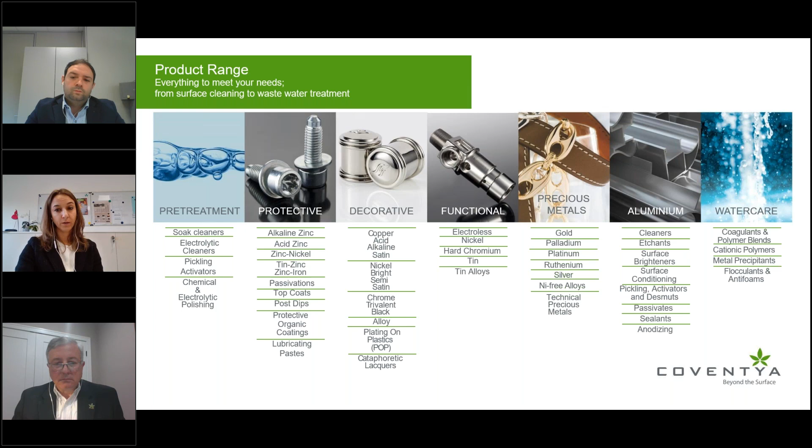We have a range of products for aluminum, covering all the treatment of aluminum, preparation and anodizing. We also support our customers in wastewater treatment with our product range for water care. You could find Coventya products across various industries: aerospace, automotive, fashion and luxury, white goods, energy, data storage, connectors, packaging, lighting, sanitary fittings, and so on.

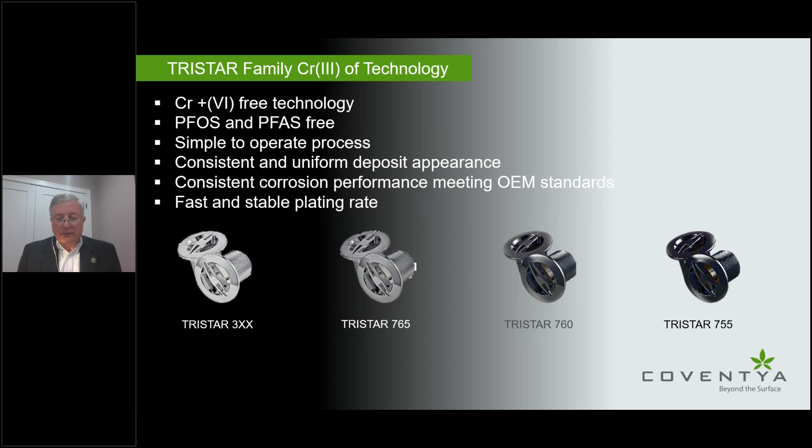Anyway, we've got basically both types of chemistries. We've got a Tristar 300, which is a chloride-based chemistry, which have a whole different set of attributes. And then today we're going to talk about the Tristar 330 AF, which is sulfate-based chemistry. And again, these meet all the OEM requirements that we need. What we can say in this newest generation of trivalent chrome, sulfate-based, it's ammonium-free too, which is a very important aspect of this new platform.

It was developed by Coventya, and we started introducing this in 2017. The process chemistry has different modes of system operation, which is something unique that a lot of sulfate systems do not have. We'll talk more about those unique properties in the course of this webinar. It also, the process offers very, very outstanding performance over present state-of-the-art. So that's why we feel this technology platform is the next generation of what you will see in the market, because it has so many advantages and so much versatility in what it will do.

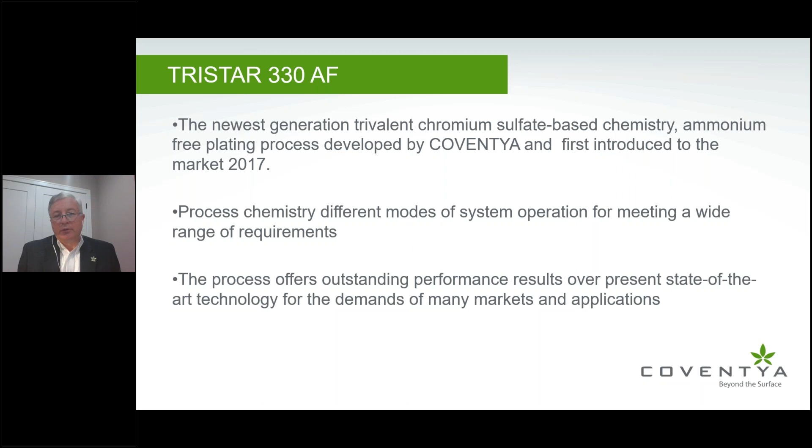Chrome 6 is applied over a lot of nickel-plated surfaces to provide decorative appearance, but also some corrosion performance properties as well. In the case of the Tristar 330 AF though, we've been able to actually adjust the operating mode of the chemistry to focus in on one or two of the important attributes. So if your customer is very focused on color, if they want a visual color that looks like Chrome 6, the blue, the aesthetic color that's similar to hexchrome, we can set the chemistry up to operate that way. And we've done a lot with colorimetry, the CIE LAB, Alberto will talk about, but we can achieve deposit hue colors obtainable from a -0.5 to a -1.5 in the B value, and Alberto will explain that momentarily.

If the customer needs decorative, of course, they're applying it for decorative reasons, but they need more functionality out of the system. What do we mean by functionality? We need to meet the high demands of either a high neutral salt spray requirement or a CASS corrosion resistance. And in that case, we've set the chemistry up a little bit differently, and we'll show you those differences shortly.

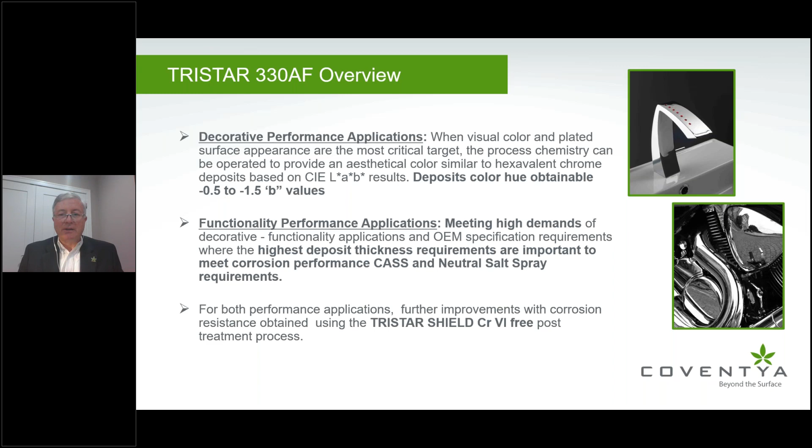But in both performance applications, we can even further improve the performance of corrosion using a new post-treatment system called Tristar Shield. It's a Chrome 6 free post-treatment, it's electrolytic, and it does a wonderful thing to the deposits here to improve their overall performance. So we've really been able to, with the R&D group, develop a system that is very sustainable today, but also into the future. And that's what we see.

So Tristar 330AF, Tristar Shield, our Chrome 6 free post-treatment, and we have also for furniture goods and tubular goods where you have the ID surfaces that require some protection because plating doesn't go there, of course. We have our Tristar Post Dip HM, which Alberto will speak about also. From the research that our company's been doing for 15 years plus in the development of these technologies, we've always maintained that, of course, we need them to be Chrome 6 free, but we want them to be ammonium free, cobalt free, and of course now PFOS, PFAS, PFOA free in the system. So these are important characteristics that we've had in mind with the whole development of the whole platform.

So some of the main features here, again, let's focus on the two different modes of operating. Why would you need that?

Again, if we're going to focus on the functionality of decorative applications, where you need high corrosion performance, or you need some type of higher level than just color performance, we use these on interior and exterior automotive vehicle components. In the plumbing and sanitary fittings area, there's a lot of need for those high corrosion performance applications. But also on the same spectrum, people like the color.

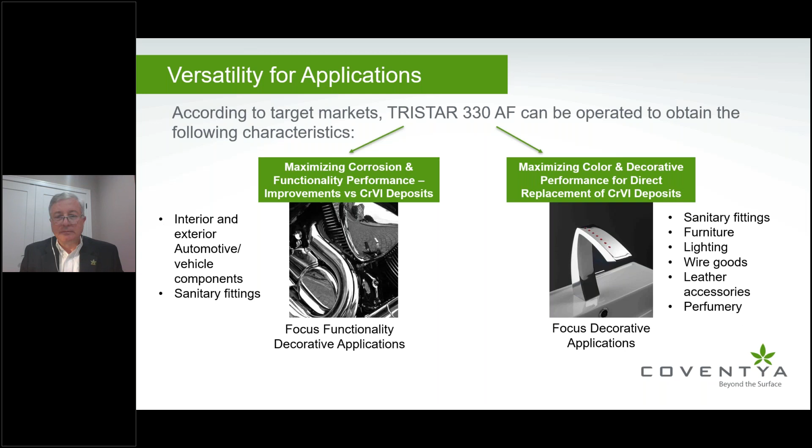Some of the features and benefits - there's a lot that can't be covered in this type of webinar, but to give you an overview, it is a production proven process. Alberto and his team are hands-on, they've done a lot with this technology in Italy and other parts of the world. So we've got a lot of experience since 2017.

We can meet both the functionality performance requirements and applications. Corrosion resistance is good. We can get the decorative performance applications, the color that people want, and we can balance the system to do a little bit of both.

And that's important - we have high throughput, high deposition rates. You'll see a difference in what we target for functional application versus decorative. We can achieve very high neutral salt spray resistance today and good CASS resistance when we incorporate the use of the Tristar Shield electrolytic post-treatment system.

One of the other elements that are important today is people are looking at nickel leaching, or the leaching of nickel layers, in a lot of different applications. With Tristar 330AF and the Tristar Shield, we can show, and we've demonstrated, that we equal Chrome 6 from the standpoint of the reduction of leaching of nickel from these coatings.

Of course, we've always had in mind the design of ammonium-free types of technologies. Also, with trivalent chrome systems, they need to be purified a little bit differently than chrome 6. With chrome 6, we worried about just a porous pot to keep trivalent chemistry reoxidated to hexavalent chemistry. But here with trivalent, the electrolyte is purified with a resin system, and we can dummy plate if we have to. So we can do all the same things with trivalent technology that we've been successful with over decades with chrome 6, just avoiding the chrome 6 altogether.

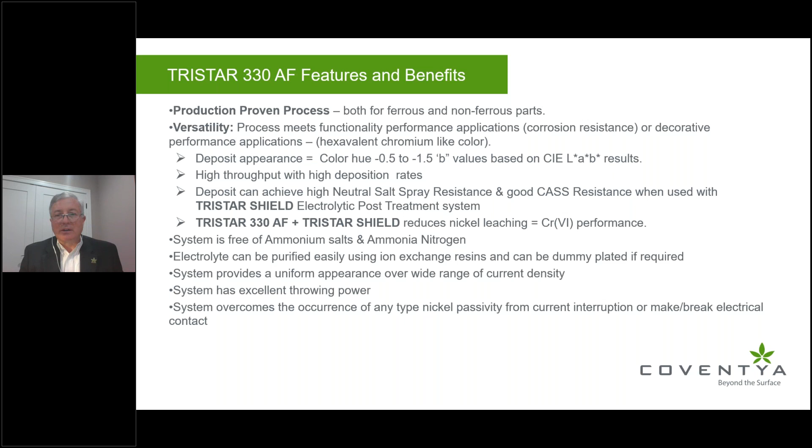The process sequence is very similar. Once you get to the nickel, active nickel surface, we have some rinsing, and then we apply the Tristar 330AF technology. We've got rinsing, and then if you need the additional corrosion performance protection, we have the Tristar Shield and the post-dip. Alberto will talk quite a bit about these technologies and some of the advantages we've seen with them.

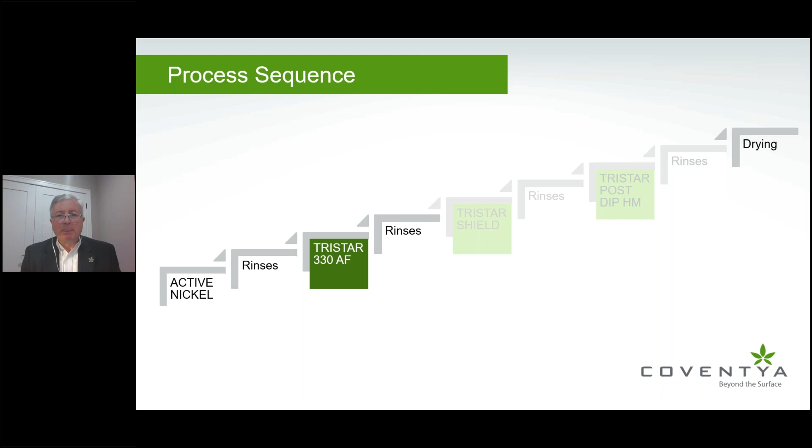If we look at decorative performance versus decorative functionality performance, we're talking about more functional application needs for the deposit versus a more decorative one. Some applications just want it to look very nice. They don't have all the corrosion performance requirements.

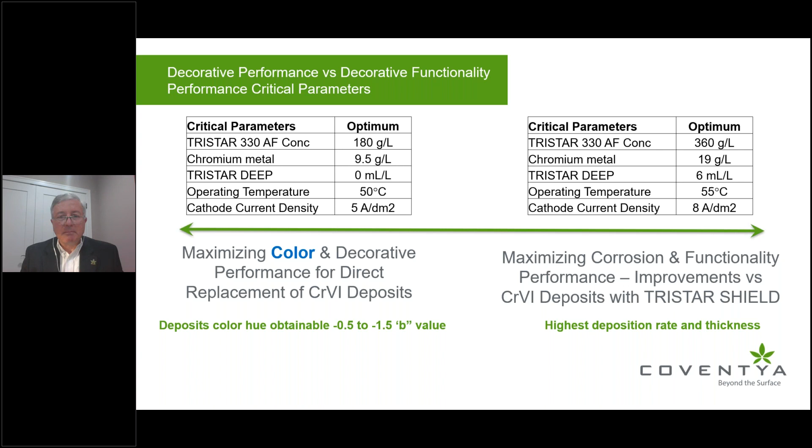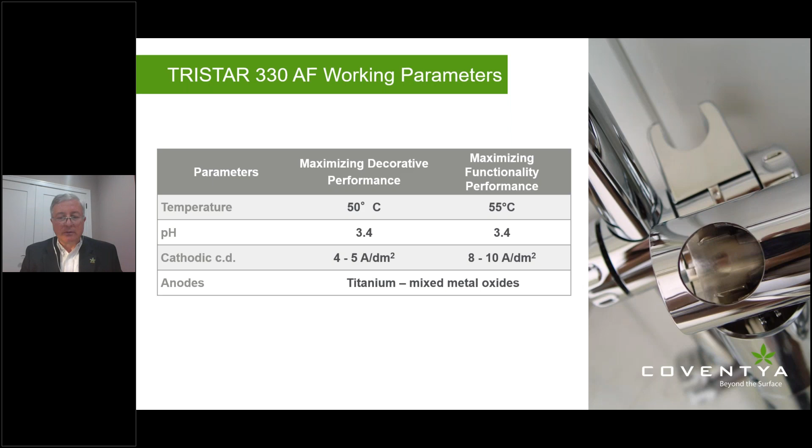Next, if we look at some of the details of the working parameters, one of the differences is operating temperature and pH between the decorative and functional performance systems. One of the biggest advantages of trivalent technology is a much higher pH than chrome 6, which is very acidic - these are less acidic than those. But again, we operate at different current densities. We use titanium anodes with mixed metal oxide coatings for this technology, and it operates very successfully under those guidelines.

So in a quick summary of where we are, we've got 4+ years of production experience, and Alberto Chiappa will talk about that in our replacement of chrome 6. It's got a very uniform aspect, wide range of current densities, which is very beneficial for a lot of complex parts. It has excellent throwing power - the distribution is very good over current densities. We have limited defects from current interruptions or other types of racking issues.

We can control the contamination through a resin system, a purification system. And it is a patent pending technology - it's a much different platform of sulfate chemistry than is out in the marketplace today, and that's why it's very unique. It's very important because of that fact, and it will be the next generation of what we see in the replacement of Chrome 6 technology.

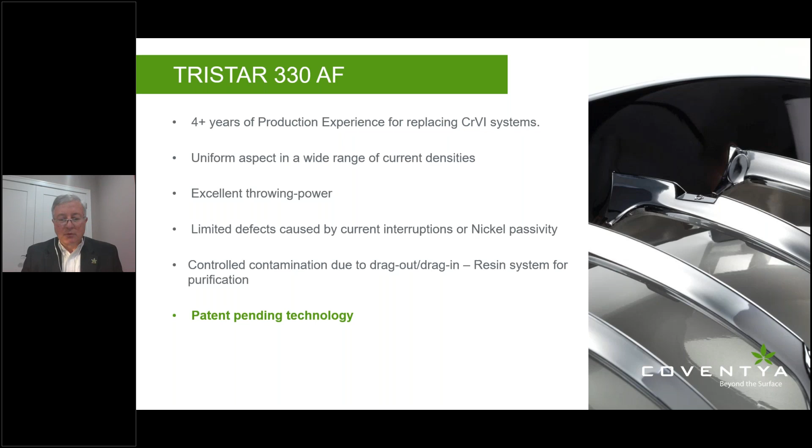So with that, Alberto Chiappa will talk about the process and deposit performance characteristics. And then afterwards, we'll do a quick summary and then we'll be ready to answer all of your questions. So thank you, and Alberto, I turn it over to you.

Okay, good morning, good afternoon everyone. Thank you, Brad, for your presentation. I am Alberto Chiappa, the Italian product manager for Deco and POP processes.

In the next slide, we will analyze Tristar 330AF process and deposit performance in terms of CIE Lab color, efficiency, very good resistance to cleaner dedicated to sanitary fittings, corrosion test, and salt spray test.

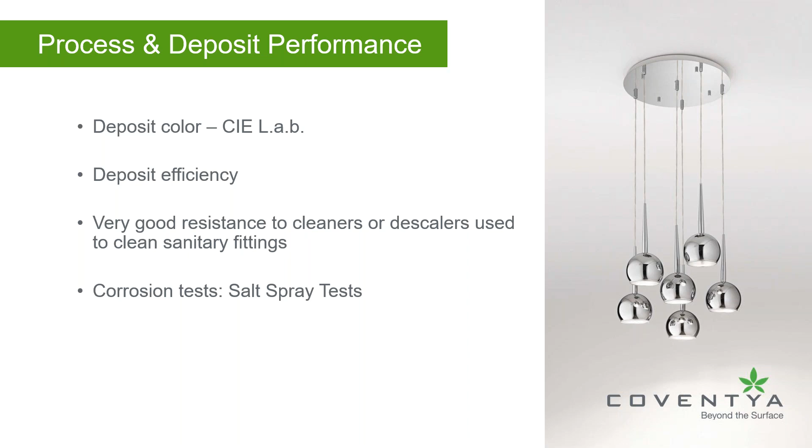CIE Lab gives the opportunity to understand the color of the chromium layer. You have 3 color coordinates indicating different color shades. The L coordinate has a range between 0 and 100. 100 is the maximum value representing the white color of maximum reflection, and 0 is the maximum absorption, meaning black color. The coordinates A and B, on the other hand, have no limit but a positive or negative value. The negative A coordinate controls green color, while the positive one controls red color. The positive B coordinate controls yellow color, while the negative one controls blue color.

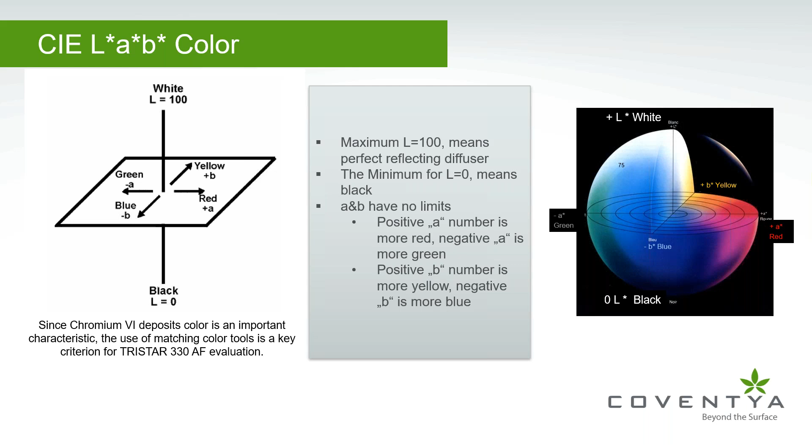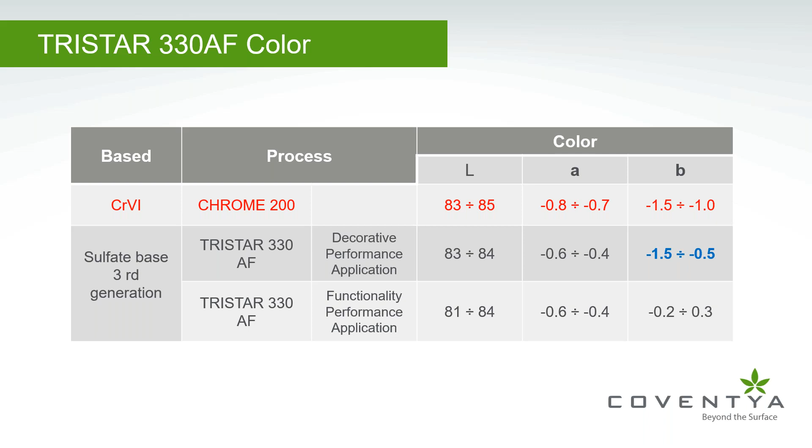This table compares hexavalent and trivalent coordinates. As you can see, the value of L and the value of A are very similar. Regarding the B value, we notice that the decorative version is very similar to the hexavalent coordinate, with a very negative B value of minus 1.5. Even the functional version has a B value tending to the negative. In summary, both versions, but mostly the decorative one, can be mounted with hexavalent chromium items without noticing the difference.

We compare now the deposition efficiency of hexavalent chromium plating and Tristar 330AF. As you can see, with both versions, but mostly the functional one, the Tristar 330AF has a higher plating rate. This allows the process to be installed without changing the position of the chromium plating tanks and the system cycle. In addition to that, the process does not lose in terms of performance.

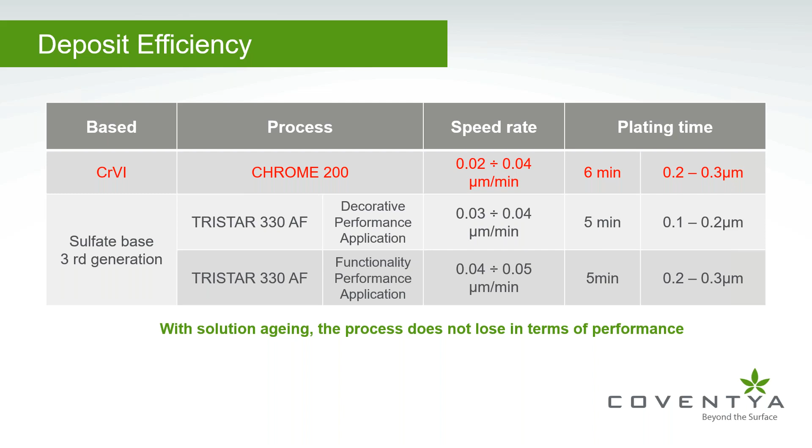The most important cleaners used in the sanitary field have been tested according to the sanitary specification. The following have been tested: Mastro Lindo, Vinegar, Napisan, Sidol, Bref, Viakal. Tristar 330AF does not discolor or degrade when exposed to these cleaners.

Next topic is corrosion resistance. To pass the test in the production cycle, you need to add a new post-treatment step called Tristar Shield. Tristar Shield passivation is a process free from Chrome 6. It is a single step. All additives are analyzable, it is easy to install, and its use does not change the deposit aspect. Finally, this process is patent pending.

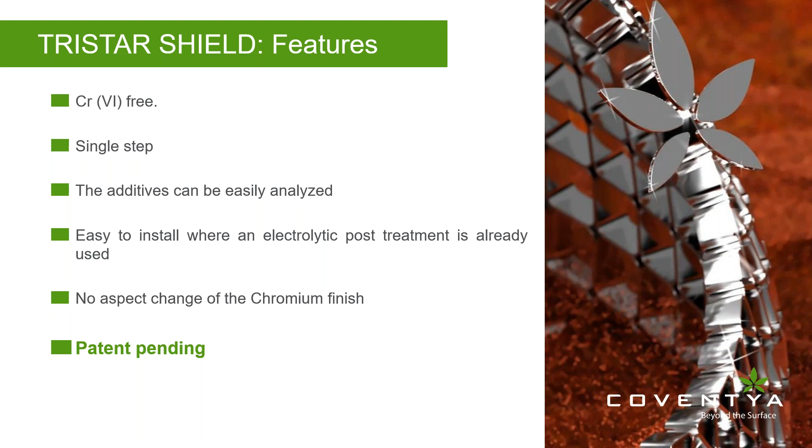Trivalent chromium plating cannot create a protective oxide film like hexavalent chromium. In fact, the layer of the deposit with no post-treatment allows slow nickel corrosion with the formation of oxide on the top of the surface. Only the combination between Tristar 330AF and Tristar Shield creates an oxide film formation, sealing the micropores and retarding nickel corrosion.

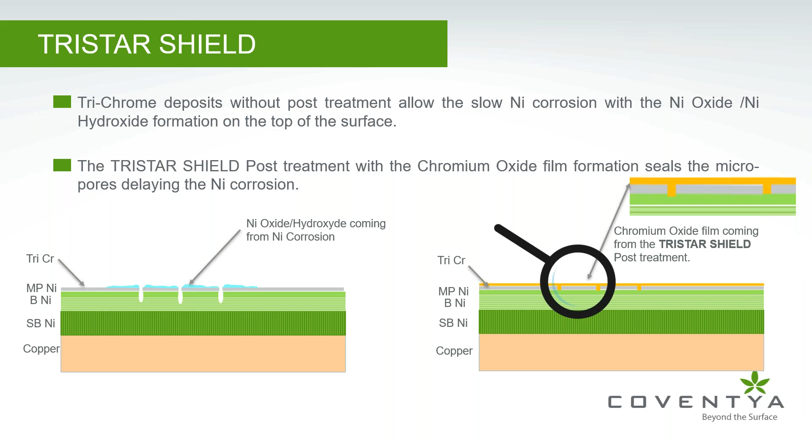These are the tests passed thanks to the combination of Tristar 330AF and Tristar Shield: the neutral salt spray test, the natural exposure and storage test, and the nickel release test.

The table recaps the working parameters of Tristar Shield. It works at 28 degrees, 9.5 pH units. It has a density of 1.5 Baumé degrees, and the anodes to be used are stainless steel 310 or 316. We also recommend solution filtration. The passivation is electrolytic, and in this case Coventya supplies the rectifier to ensure process performance.

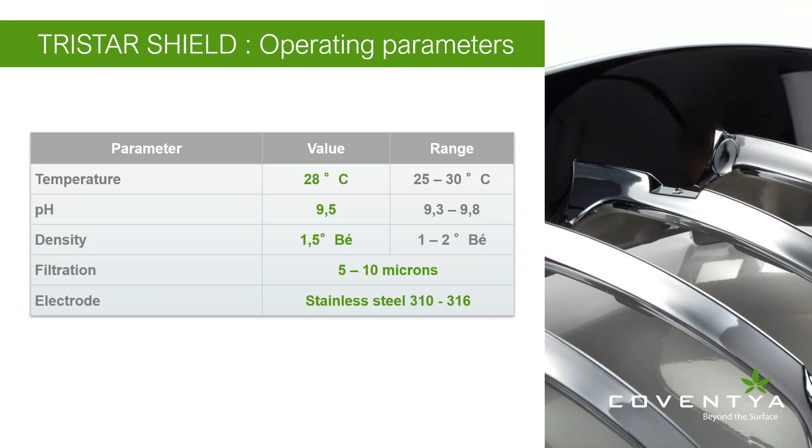Now you can see how Tristar Shield on brass or zinc die cast base material helps passing the 480 hour salt spray test with no appearance of stain, holes, or other change due to corrosion.

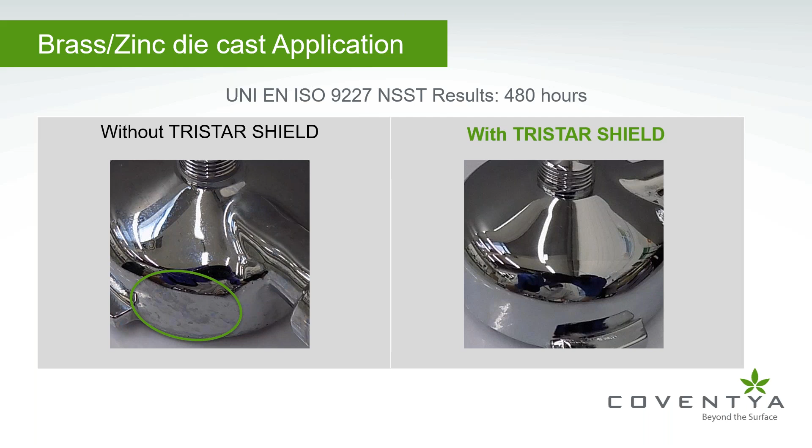On an iron base, Tristar Shield helps passing the 24 hour salt spray test. This result is comparable to hexavalent chromium plating. As you can see from the picture, Tristar Shield manages to protect the less covered and more porous areas that are easier to be exposed to rust occurrence.

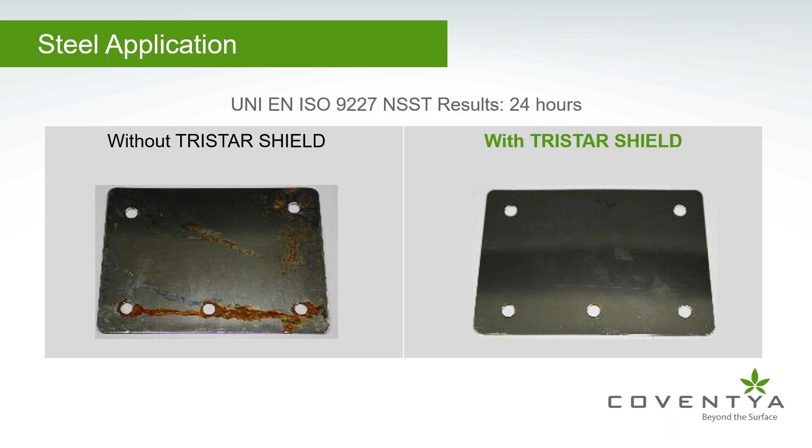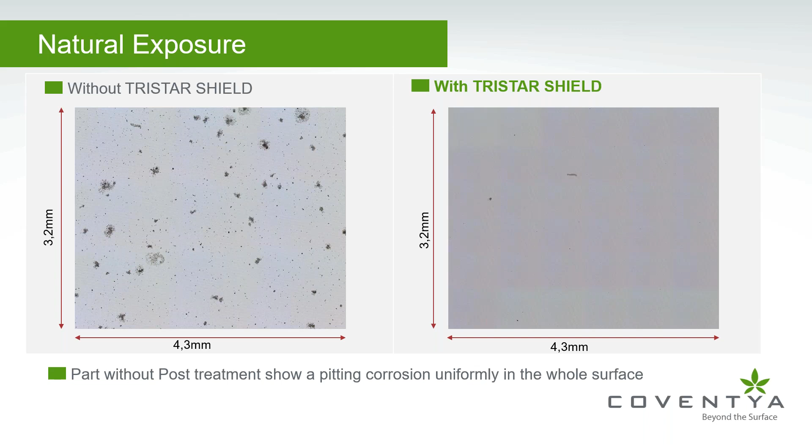As shown in this photo, all trivalent chromium plating shows some salification or corrosion beginning. It happens because the surface layer has not been treated with a protective post-treatment. After Tristar 330AF, using Tristar Shield allowed solving both natural exposure and storage issues, fully preventing surface corrosion from starting.

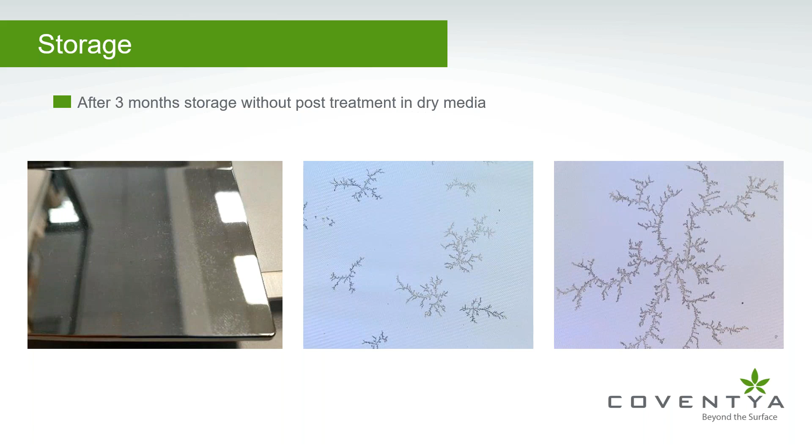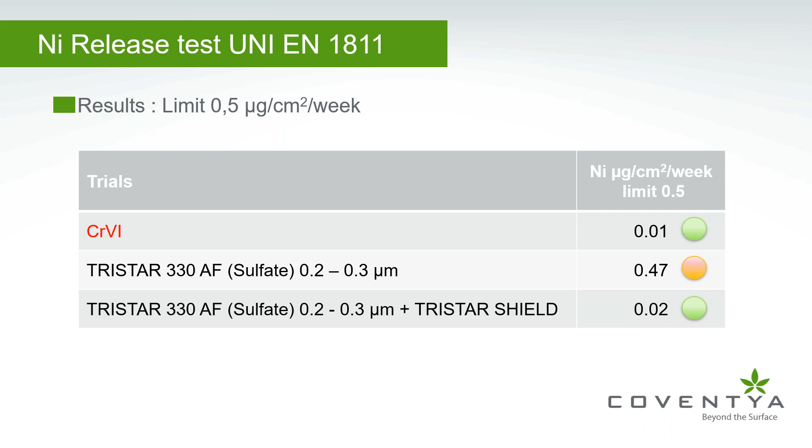So let's recap a little bit about Tristar Shield. It is REACH compliant, industrialized by several customers. It meets the requirements related to salt spray test, such as 1,000 hours for POP application dedicated to automotive, 408 hours for items made of brass or zinc die cast, and 24 hours for steel.

It enables meeting nickel release requirements. It's very easy to install and use, needing just a single step. It is good for all Tristar deposits: the light ones are Tristar 300 and Tristar 330AF, and the dark ones are the 725, 750, 760, and 765 processes.

Another problem is linked to the formation of rust inside the iron tube. It is caused by Chrome 3 that doesn't passivate the inner tube. For this reason, we added another step to ensure protection inside the tube. This step is called Tristar Post-Dip HM, which is added after the Tristar Shield.

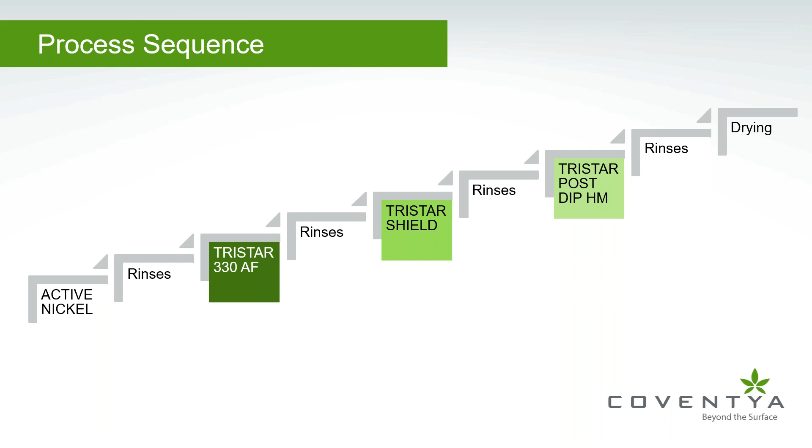The Tristar Post-Dip HM is a chrome 6-free post-dip which increases the resistance to corrosion due to humidity. It increases the resistance to abrasion. It limits fingerprints, and the deposit shows no change in terms of color. It is mainly used to protect inner pipes, assuring protection and reduction of rust.

Now, this process is used by one of the major furniture manufacturers based in Sweden.

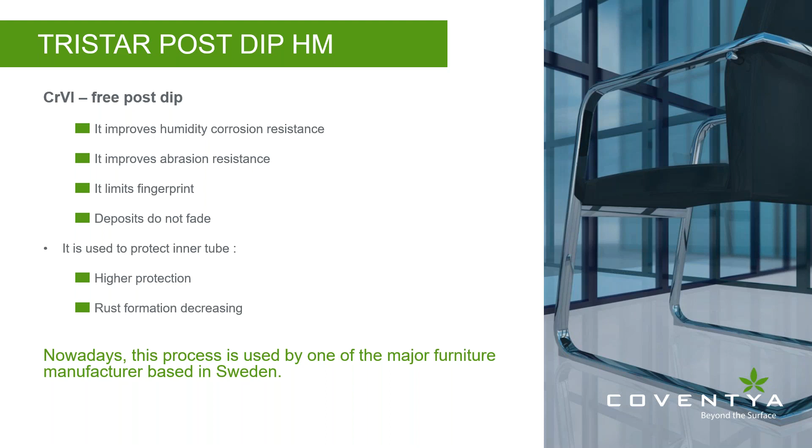Finally, let me show you the application fields of Tristar 330AF. To name a few: automotive, sanitary fitting, lighting, and many more.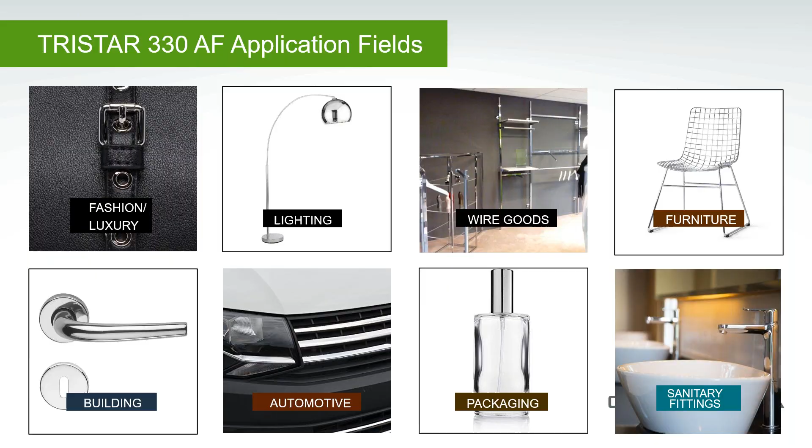Thank you, Alberto. Conclusions. What can we conclude? The reality is that we've evolved the technology platform today with Tristar 330AF, specifically from our family of Tristar processes. They work over plating on plastics applications, on brass and zinc die-cast plating applications, and on steel applications. So we can fully replace Chrome 6 decorative plating technology with Tristar in these applications.

And we meet or exceed, in some cases, the automotive OEM requirement standards, and some of the other more stringent requirements for sanitary fittings companies, as Alberto demonstrated, performance against a lot of the household cleaners and things that are there. So we have very good corrosion performance from these technologies today, and we have added protection afterwards, either with Tristar Shield or the Tristar Post-Dip for tubular type work.

Next, if we look at Coventya non-Chrome 6 technology, basically we need the post treatments because, as Alberto said, Chrome 6 is very good at passivating unplated surfaces in the case of steel and things like that. With the trivalent technology, it doesn't do that, so we have to give it a little bit of help. We can use the Tristar Shield and combinations thereof.

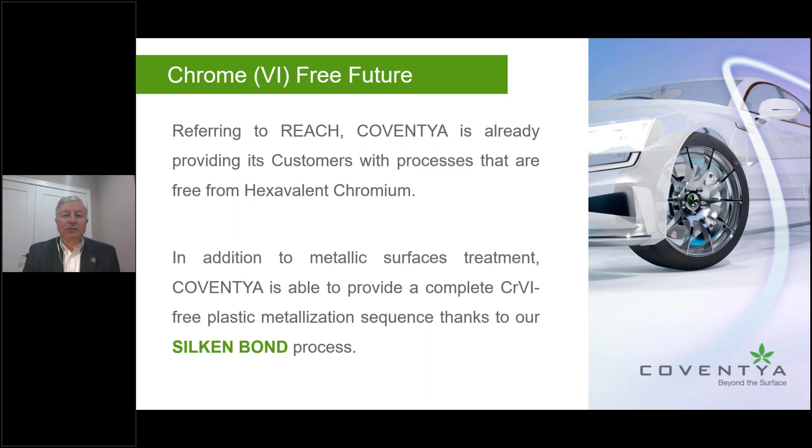In addition to reinventing and developing technologies, now with the Silken Bond process, that's our plating on plastics metallization process, we can eliminate the use of Chrome 6 etching at the front end of the plating line. And at the back end with the Tristar 330 AF, we get rid of Chrome 6 decorative technology with the trivalent. So we can support the full customer getting out of Chrome 6 today, which is a very important goal for our company, and it's good for the environment and to maintain sustainability as well.

Just to summarize again, we have developed the next generation of sulfate chemistry. It's very versatile, we can meet all types of production applications, and we've had this in production for four-plus years. This is where Alberto's done a lot of hands-on experience and training some of our other colleagues at Coventya, getting the knowledge out. This has a very, very uniform aspect and color over a very wide range of current densities, and has excellent throwing power.

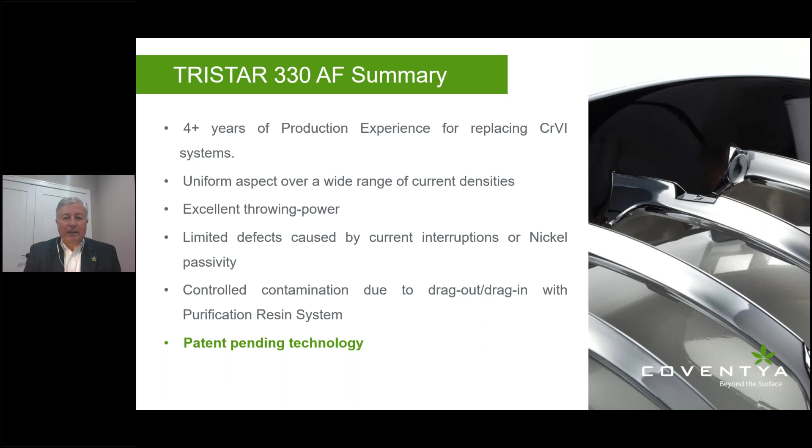And we can control the contamination with the purification resin system, our Tristar resin system will work. And most importantly, don't forget it's patent pending technology, which means it's different. It's not like the other technologies out there because we've been able to protect it with patents. So it is a different platform of chemistry and it is the future. So for Coventya, this is our goal, this is very important for us. That's our tomorrow is today.